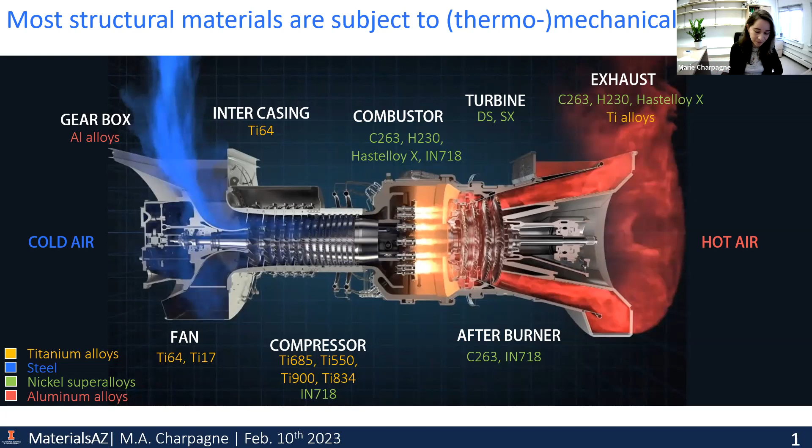All these alloys are, of course, subjected to very different things, but one common solicitation that they undergo is fatigue. Fatigue is this cyclic loading of materials that can be thermomechanical or just mechanical. Over time, this cyclic loading is going to degrade the materials as they're subjected to heating and cooling cycles or power cycles for this gas turbine. Let's start with the hottest part.

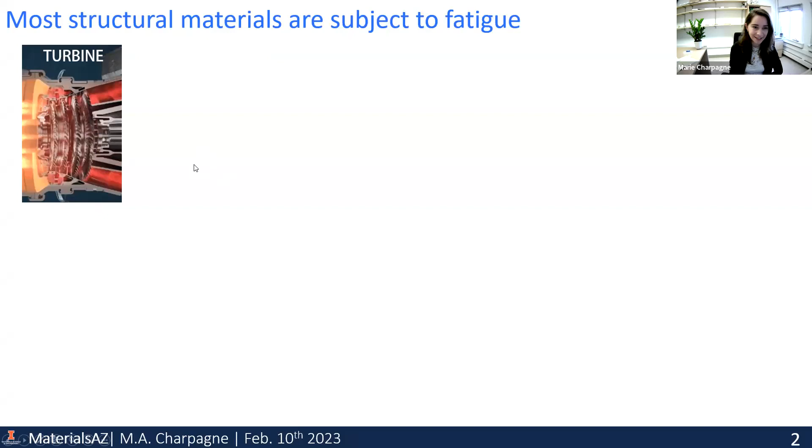That's the most exciting part, where we find those nickel-based superalloys. Of course, you can see they are subjected to cyclic stresses and also temperature oscillations. But I think the most detrimental part is the stress here. So mechanical fatigue is a huge problem. It's a long-standing problem: understanding its origin, understanding the linkage between the materials' properties and their fatigue performance has been a long-standing question for decades. And I think it's a really difficult question to answer, because solving fatigue is pretty much like looking for a needle in a haystack, really.

But when we extract one of those turbine disks in the hottest section and look at where the fatigue cracks actually developed, we find that they are not even located in the region of the disk that was exposed to the highest temperature, but rather towards the edge, where you have relatively lower temperatures. So temperature is not the only problem. The most detrimental areas are actually in the cooler sections of these turbine discs. That tells us where to look and where fatigue really is critical.

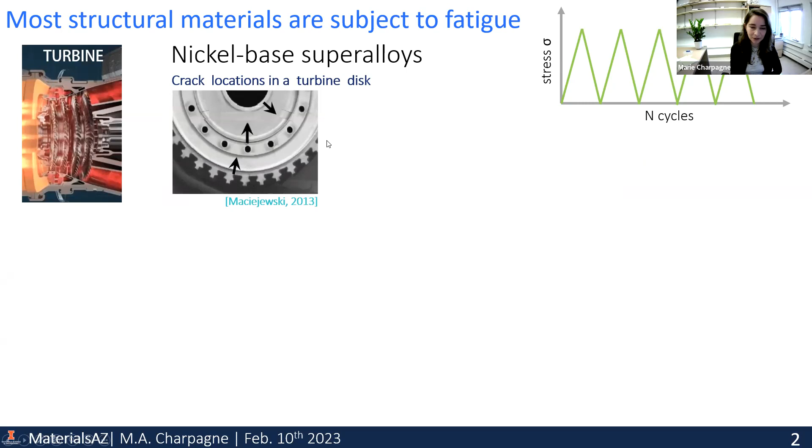When we do so, we identify our cracks and look at these initiation sites for fatigue cracks by looking in the SEM, scanning electron microscope. We oftentimes see some crystallographic facets that show up, meaning that there is most likely a linkage between the microstructure and where those facets are in the material's structure at the small scale, and where the early fatigue cracks are going to form.

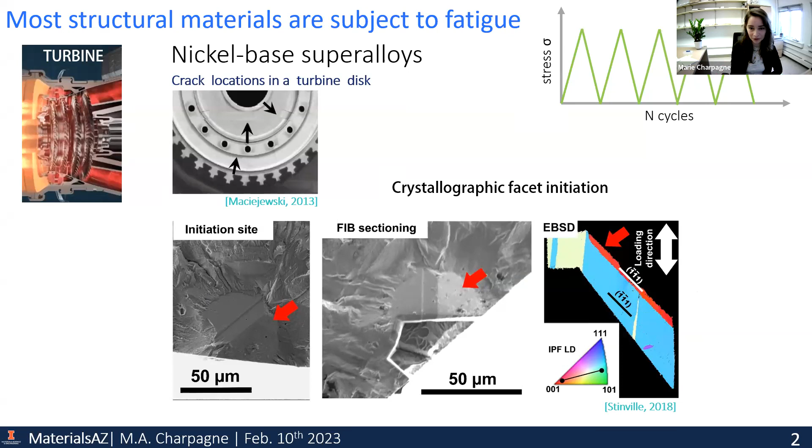So that's the first hint that fatigue is actually related to the material's microstructure, so the crystalline structure of the materials. And looking at the cooler parts in this gas turbine engine, we have titanium alloys. When we look again at these initiation sites, we again find, in pretty much all titanium alloys in recent work where we highlighted this, that the initiation sites also correspond with crystallographic facets.

This is an HCP material, and of course the crystallographic facets are very different. Here we're looking at twist boundaries between the basal planes, between two HCP crystals. And that's after many cycles, right? You don't have a crack in the first cycle, thankfully. But when we look at what happens in the very first loading cycle, we see the development of what we call a slip band.

And so early on, this hints towards the fact that we already have some signature of what's going to become a crack eventually when we add cycles. One bad news, though, is that the density of these twist boundaries is very, very low. We have just a handful per square millimeter of material.

And anyone who does scanning electron microscopy knows that when we look at 1 millimeter by 1 millimeter in the field of view, this is a huge area. And so again, as I mentioned, this is another problem of finding very fine features that are very hidden and buried in the microstructure, and over very large areas. So you have this trade-off between trying to find very small features that are very sparsely distributed in microstructures. So that's the challenge that we're facing when we study fatigue. And that's why it takes a long time to solve these kinds of issues.

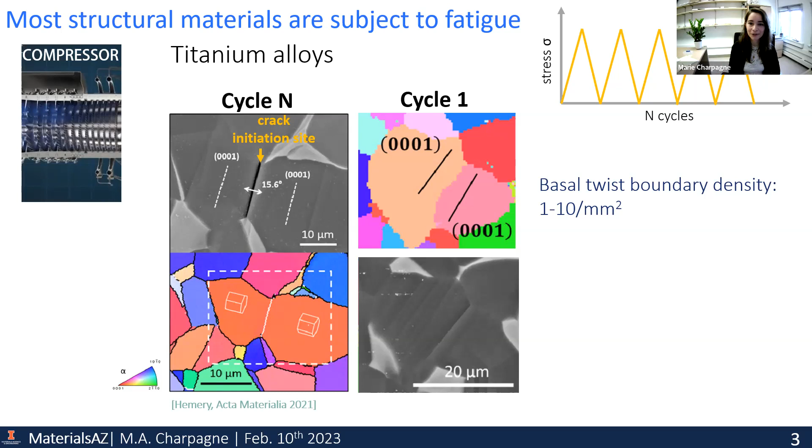But I'm going to show today, with new techniques, what we learned recently on this problem and how these new techniques are going to drive the design of the next generation of structural materials that hopefully will resist fatigue better. All right, so the first part, of course, is that we've got to learn from what we have. In conventionally processed materials, we have essentially engineered materials quite a bit already. So what can we learn from studying fatigue and early crack initiation and early damage formation in those materials? We learned a lot recently, so I just want to start by highlighting this so that we all know where we're starting from. And in the second part, I'll highlight how these findings will help us design better materials.

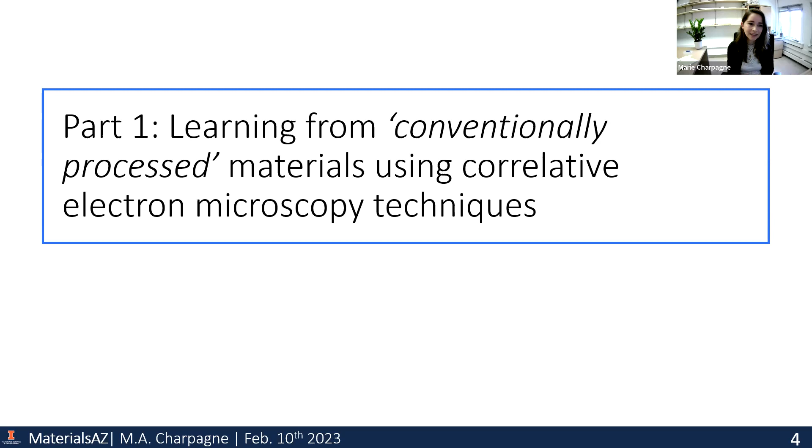Okay, so I mentioned that early on, in the very first loading cycle, we already have some, not even damage, but some plastic deformation that develops in the material. And I mentioned the term slip band, and before I continue talking about this for roughly 45 minutes, I really want to dwell a little bit on what a slip band really is. The slip band results from the motion of dislocations in the crystal lattice. Each dislocation is defined here on this schematic as this half plane that glides on its slip plane. As it exits onto the material surface, you have a unit step, a very small atomic extrusion of unit vector B. That vector has a direction and also an amplitude, and that's characteristic of each material.

And when we look at the slip bands, there are several techniques that we can use to look at them. Here is transmission scanning electron microscopy. This is the modern technique, essentially STEM, but in the SEM, and you can see your dislocations through a thin foil. Here the slip bands are those elongated features where many dislocations have been gliding. Here I've shown the process of one dislocation creating one unit step. But of course, if you have collective motion of dislocations on a similar slip plane, then you get a higher step. So by measuring this step, you can work out how many dislocations actually traveled through the slip band.

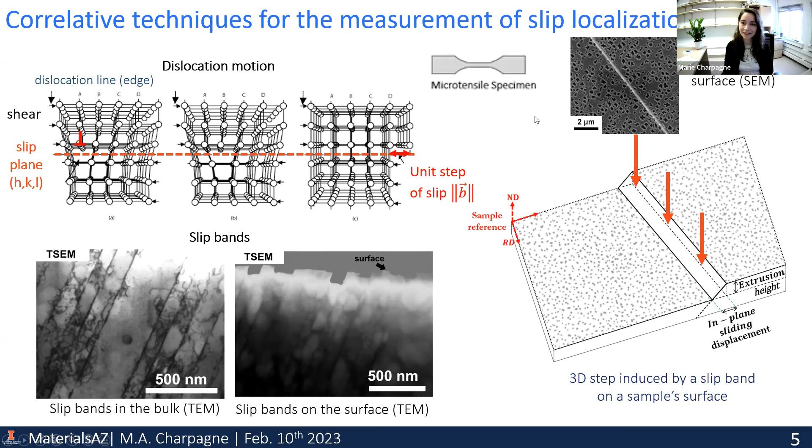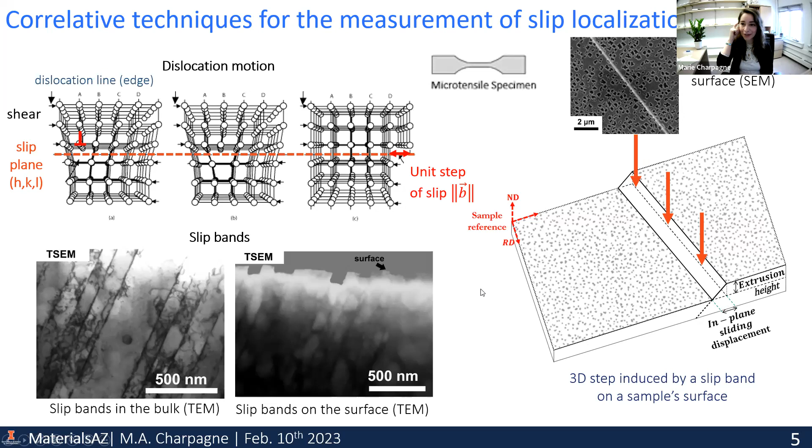So summarizing, this is by looking in transmission. When we take a microtensile specimen and pull on it, we can see, looking from the top of the specimen, those very small extrusions in secondary electrons in the SEM. And these are the signature of a 3D slip band. The slip band is a 3D object, right? So the challenge is, of course, measuring this step. And recently, my colleague JC has developed very high resolution digital image correlation to track how these slip bands emanate on the surface and what signature in displacements they bring onto the surface of these microtensile specimens.

Maybe you're familiar with the idea of digital image correlation. Basically, on the macro scale, you take your sample, your area of interest, and you deposit a speckle of particles or paint onto the surface. And then as you deform the specimen, you can track how these particles moved on the surface. And from this, you can back out your strain in 2 dimensions on the surface. And this is at the macro scale. So this is a commercialized, well accepted technique.

But in the scanning electron microscope, we can do a similar approach. The main challenge is to have a smaller speckle for higher resolution, and also having a stable electron beam so that we can image those particles very well. And this has been developed, as I mentioned, by my colleague JC over the past 10 years. And this is now a technique that works really well. There are several techniques to get those nanoparticles onto the surface. But essentially, the idea of SEM DIC, so DIC collected in the SEM, is that you just miniaturize all the principle of digital image correlation so that you can image much finer features.

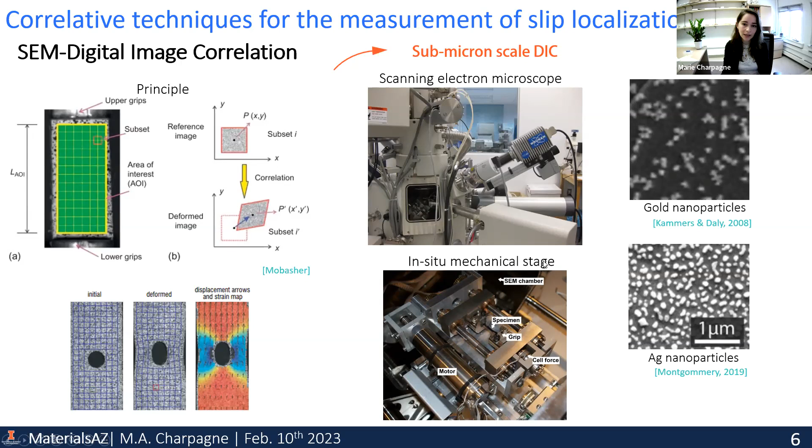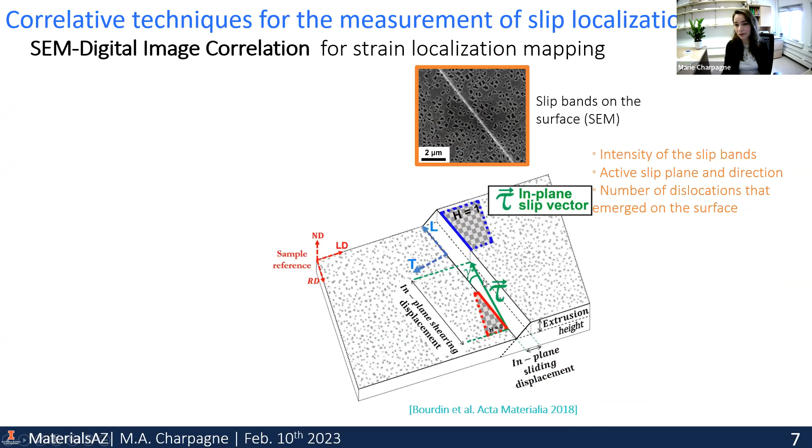And in our case, of course, we're interested in those slip bands, which we can see in secondary electrons. But from electron images, we cannot quantify how many dislocations are actually traveling in that slip band. And so with the new technique that JC developed in collaboration with the French team, they have made these DIC codes tolerant to discontinuities. As you have a slip band that forms here, you now get a discontinuity in your strain field. And the new technique that they developed, which is called Heaviside DIC, allows us to actually quantify the height of this step and how wide it is.

So from this, we can actually back out physics-based information that really represents the reality of what's going on here in those materials, meaning the intensity of the slip band. We can identify the active slip plane, but also the slip direction, and we can even back out the number of dislocations that contributed to the formation of that slip band. So this is now a very powerful technique that we use on a routine basis, because you can probe very large areas with it, up to several millimeters, and it doesn't take that long. So it's very mature and robust right now.

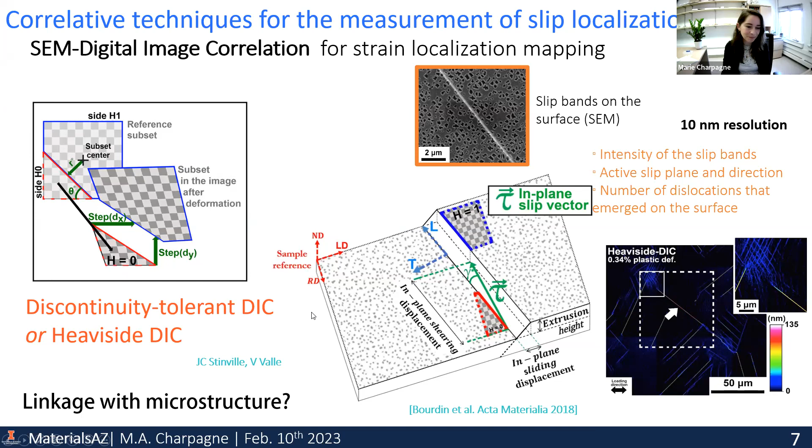So now that we can map what we're interested in, meaning this discontinuous strain field and those slip bands, what question we naturally ask is, what's the linkage with the material microstructure? As you can see here, these planes are related to the orientation of the crystals, and so it's not random stuff. We actually try to understand now how this field of slip bands is connected to the microstructure. So to do this, we need to, of course, map the microstructure, and there are commercially available techniques for this. The most powerful one is electron backscatter diffraction, EBSD. So this is an example of what maps we can acquire with this. Here, each crystal within our region of interest is colored according to what crystal direction is along our loading direction, which is horizontal in this example.

And over the past 2 to 3 years, I've developed some data merging capabilities and correlative microscopy tools so that we can accurately recombine these very high resolution digital image correlation maps with EBSD. The challenge is essentially that you collect these two with different detectors, at different tilt angles, with different beam settings and acceleration voltages, and EBSD is really subject to a lot of distortions. So it's not something you can just eyeball and do by hand, especially when you collect areas that are of the millimeter size. And so with machine learning and image segmentation tools, I was able to come up with a framework that actually takes DIC images on one hand and EBSD data on the other hand to recombine the location of each slip band into the initial microstructure.

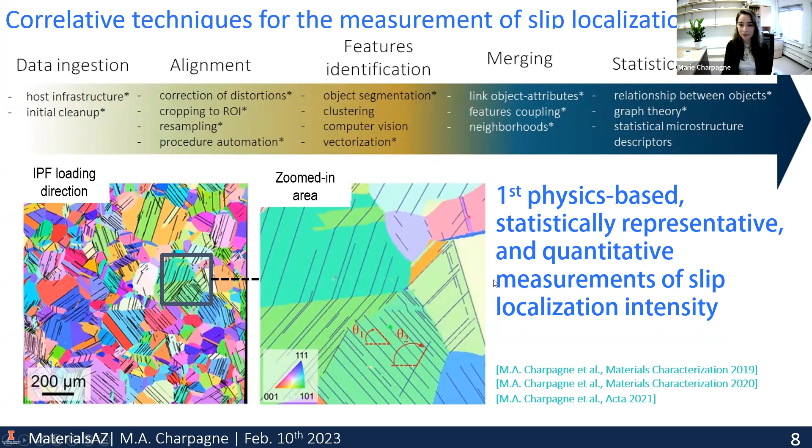And so with this, we have a very robust framework where we can really statistically investigate the slip localization intensity, meaning the intensity of those slip bands, as a function of the microstructure in pretty much any material. So the whole workflow is very robust, and we've collected many data sets. The major finding with this framework, given that we had so many materials, was published recently in a high impact journal, where we found that the fatigue strength of any metallic alloy that deforms by this process of dislocation slip can actually be predicted by the amplitude of slip localization during the very first loading cycle.

So that proves what I was showing initially in the first slides, where I was showing in the first cycle formation of different slip bands. Now that we can measure their intensity over statistically representative areas, we can actually connect this to macroscopic properties such as fatigue strengths, which is what we did here, and find out some universal correlations. So this was published just last year, and I think this is the major finding with this technique.

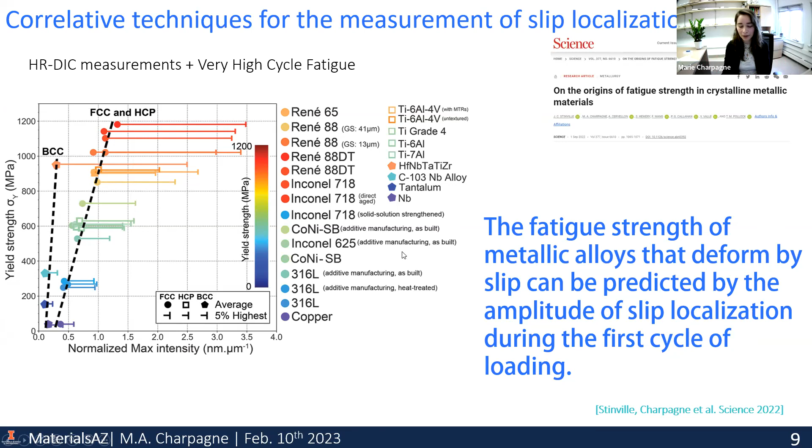So going back to our idea of mapping the microstructure, well, we can now, using this idea that you can extract the fatigue strengths of any material without actually doing a fatigue test, by just doing one cycle in tension, we're now down to trying to understand how the slip bands form as a function of microstructure. And we did that in a bunch of materials in 2 dimensions and found some correlation.

But we thought that, since the dislocations come from the bulk of the material, it would be more insightful to actually collect the 3D microstructure of the material and map the slip bands in 3 dimensions. And this is very much COVID work here. I want to mention, we're all complaining about the COVID, but if COVID didn't happen, I would never have done that. So I came up with this framework that was even more ambitious, where we can reconstruct slip bands

in 3 dimensions. So here, using the tool I just introduced a couple slides ago, where we can recombine EBSD and DIC, I extended this framework so that we can combine DIC with not 2D, but 3D EBSD. And it was very convenient in Tresa's group. We have this tri-beam microscope that's now commercialized, but we can really collect very large volumes of 3D materials. So we came up with this very first merged DIC 3D EBSD dataset, which is very, very insightful.

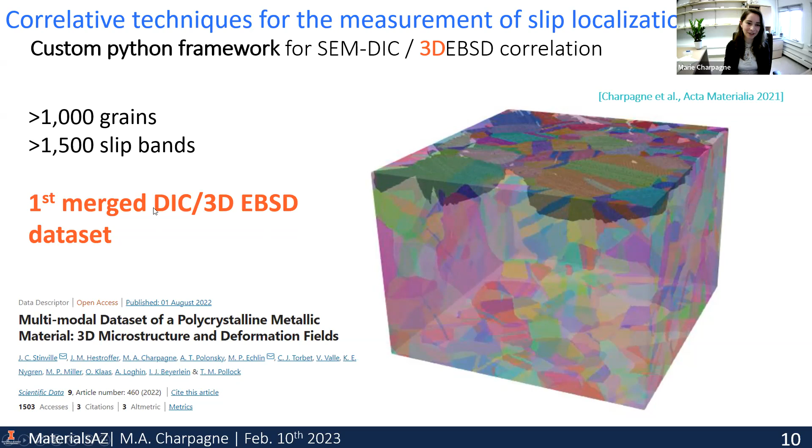And so what we found with this kind of DIC and 3D EBSD merged dataset, well, we can now look for the first time at slip bands in 3 dimensions. And we found that a large fraction of those slip bands actually develops near specific boundaries that we call twin boundaries. These are particular boundaries that form in any FCC material upon annealing, so that's where their name comes from. They're very flat boundaries, and they separate two crystals that are within a particular twin relationship.

We found that most slip bands actually form next to these twin boundaries, especially the ones that are coherent, that are very large, meaning if you have a very large twin plane area, and also the twin boundaries that separate orientations with a large difference in directional modulus with respect to the loading direction were actually the most detrimental. And by this, I mean the most intense slip bands were located nearby these twin boundaries. So that tells us where the weak link in pretty much any FCC material is. It's these coherent, large annealing twin boundaries that have this particular orientation in the material.

Okay, so now that we know what we have to work on, well, we have first highlighted the linkage between the microstructure and the strain field that we can map in DIC. And we have highlighted that annealing twin boundaries are the weakest link in those microstructures. So by tweaking the microstructure, we're hopeful that we can get rid of very intense slip bands and hopefully increase the fatigue performance. So this is our new paradigm that we call slip delocalization. And I'll explain a little bit what this is. But really the idea of this principle is how to design and process better materials so that we get rid of the weakest link in the microstructures.

All right, so the principle of this new approach is to minimize slip localization. And as I've mentioned, we have many slip bands that developed in the microstructure. Some of them are harmless and others are really bad for crack initiation. And so if this is the distribution of the intensity of our slip bands and their number density, well, we usually, in commercially available materials, have some sort of distribution that looks like this. And the detrimental slip bands are the most intense ones. So these ones lead to early fatigue crack formation, and we want to get rid of them.

Now that we know where they are, how can we engineer materials that have this kind of distribution, where you have a modified microstructure so that we get rid of these detrimental slip bands and favor the formation of smaller slip bands of reduced intensity, and having more of these smaller slip bands. Of course, we cannot have a distribution where we just cut off the tail of the orange one, because we have a given amount of plastic deformation that the material is subject to, right? So this is a fixed parameter. So imagine the area under that curve needs to be constant, but we can actually try and shift the curve to the left here so that we don't have those very intense slip bands anymore. So that's our approach.

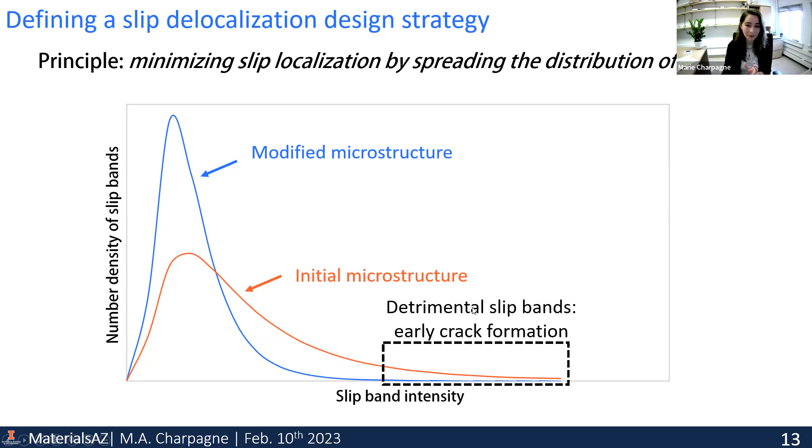And now that we know where these very bad slip bands are, we're trying to work on it. So going back to this idea of annealing twins, when we look at which ones are bad, I mentioned they are coherent, large, and have a particular orientation with particular directional modulus. Well, how can we manufacture materials that either don't have coherent twin boundaries, have lower twin plane area, or maybe select their crystallographic orientation?

About the third topic, I just want to mention that all the materials that we're dealing with are texture-free, so this is pretty much hopeless. And we decided not to investigate this because we cannot really control the texture of the material as much, so that we wouldn't have large differences in directional modulus across the twins. Also because we have 4 twin variants per orientation. So this is, I want to say, almost impossible to do. However, we focused on trying to break the coherency of the annealing twins and reducing their twin plane area. And this was done by adapting the thermomechanical processing of our alloys.

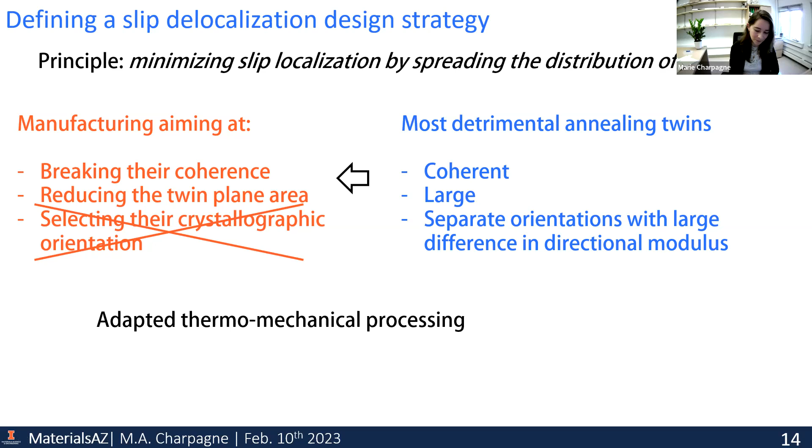So this is the first example I want to detail now. We came up with a modified forging sequence for a different material, but it doesn't matter, another FCC superalloy called the Waspaloy, where we have an adapted process that consists of a first step where we forge our material at high temperature to trigger full recrystallization. So as we are forging at high temperature, we call this dynamic recrystallization because recrystallization is happening dynamically as we deform the material. So we end up with a first category of very large grains that are dynamically recrystallized, meaning that they have some dislocation density.

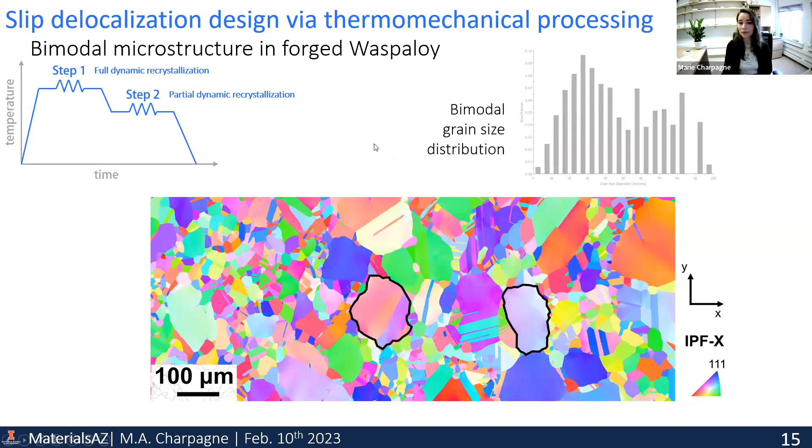And then we cool down our material to a lower temperature, but continue deforming it so that we have partial dynamic recrystallization, so a second round of recrystallization. And because we're at lower temperature, the grain boundary mobility is much lower. So we form smaller grains that don't even have time to consume the first initial big grains. This kind of microstructure is actually called necklace microstructure, where you have very large grains that are surrounded by smaller ones. And we end up with this bimodal grain size distribution, as you can see here.

Another characteristic of this microstructure is that in the grains that were formed in the first step, large dislocation densities remain and were added during step 2. And these high dislocation densities manifest themselves by large lattice rotations. So here I'm showing the same EBSD map, where you can see that those large grains have large rotation in their misorientation with respect to the average orientation of the grain. So this is a signature of the presence of geometrically necessary dislocations that are there to accommodate the humongous amount of strain that we put during the second step.

On the other hand, you see that the smaller grains that were formed during step 2 are much smaller and also more stress-free, if I may say, given that they're pure blue here. They have more consistent orientation throughout, and they are not subject to very high rotations. The reason why we applied step 2, I just want to comment on this, is to increase the strength. Because if you have a microstructure that has very large grains, of course, the strength goes down. So the second round is there to crank up the strength of this material.

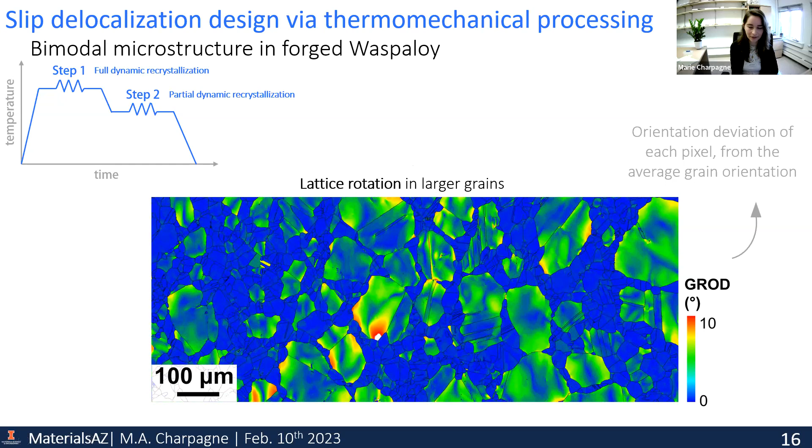So this is another characteristic of those grains. And then looking at what we really are after, meaning the twin boundaries. So we see that in those large grains, of course, we have twin boundaries that formed during step 1, dynamic recrystallization. However, in the second step, they are very distorted because of these lattice rotations that were added.

And so we're looking into how that has affected the coherency of those twin boundaries, because, just reminding you, we want to get rid of the large and coherent twin boundaries. And we find that most of these boundaries have become incoherent during step 2, which is good news. Now they're just like random high angle boundaries that are somewhat planar, but not quite coherent anymore. So this is good news for the larger grains.

And in the smaller grains, as I mentioned before, the smaller twin boundaries are not as detrimental. They're still coherent, but we think this is not so much of a big deal for shifting our distribution of slip localization events.

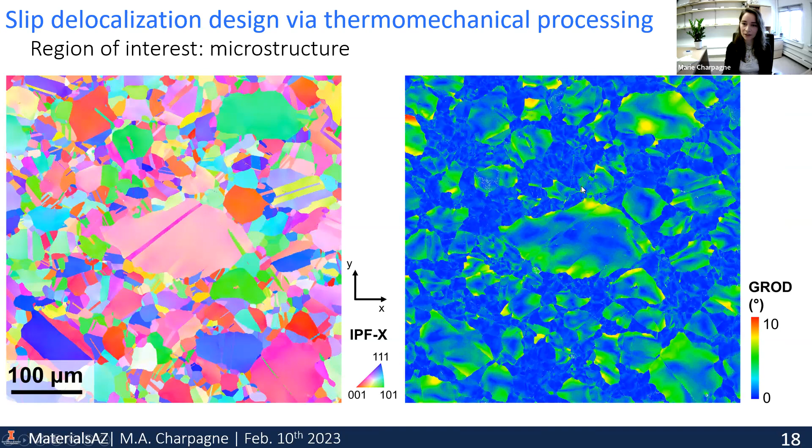All right, so we go back and take this microstructure and actually make a dog bone out of it and measure with high resolution digital image correlation. We measure our distribution of slip band intensity. So this is our region of interest. You can see we have this very large grain here in the center, a couple of others that are subject to very high lattice rotations, and then our second population of smaller grains that are more stress-free.

All right, so because we have correlated data with orientation versus DIC, we actually can look at every single slip band that formed nearby twin boundaries and check how their intensity has evolved in comparison with an equivalent material. So this is comparing with a different material, Inconel 718, which has a similar yield strength. So we can roughly compare these two qualitatively.

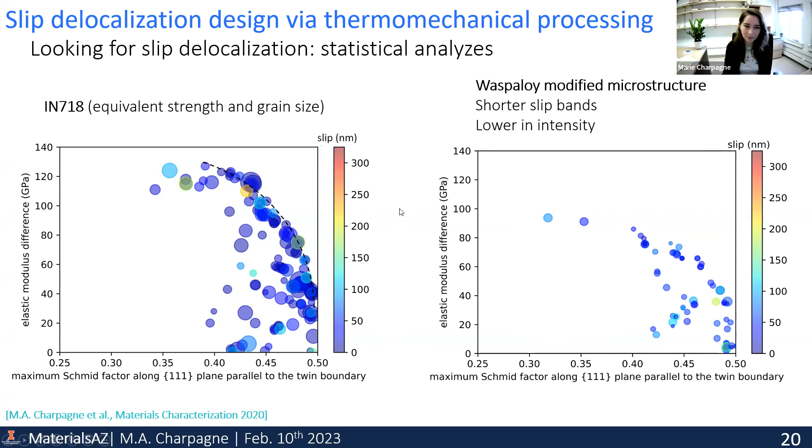So that's the first mechanism, which is good at making slip bands of lower intensity. But of course, we still have a fixed amount of plasticity that this material needs to accommodate. So we found a second mechanism, which we call stop and go for lack of a better name for now. Essentially, this happens again in those regions of high lattice rotations, where some slip bands not only decrease in intensity, but sometimes you also have the formation of another slip band of mild intensity nearby the first one and on a similar slip system.

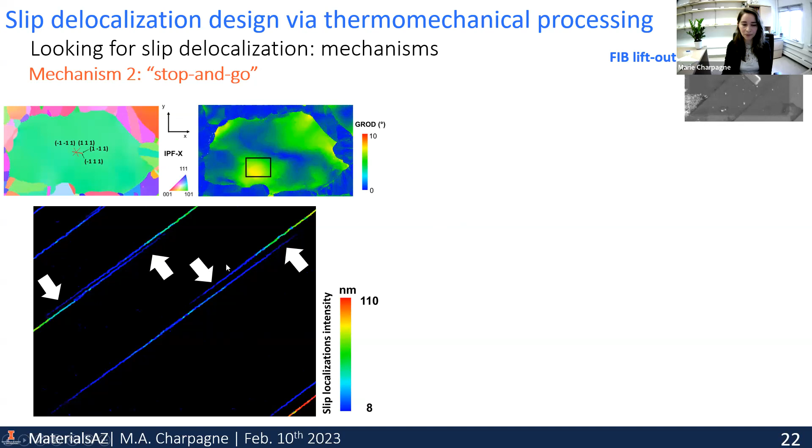And here are two examples. So we had the first slip band here and the second one that formed after the fact. And here another one and this very mild slip band that came in right nearby. To try and identify the fundamental mechanism behind this, we took a FIB lift-out to see in depth what happens in the bulk of the material, underneath this surface. And we actually found a lot more dislocation activity than we thought we captured on the DIC maps, meaning that we have way more slip bands that contain very, very few dislocations underneath the surface.

And the question of what the fundamental mechanism is is still in the process of being answered. We can think of either cross slip from one slip band to another, which is kind of difficult to tell from how tangled these slip bands are and how compact they are. But that could be one mechanism. The other mechanism we're thinking about is activation of a second source of dislocation just nearby the first slip band. So, like from the bottom of the grain, a second source gets triggered to emit another slip band. So this is still unanswered. It's a very tough question to answer, but I think the fact that we see these kinds of mechanisms is very promising with respect to fatigue.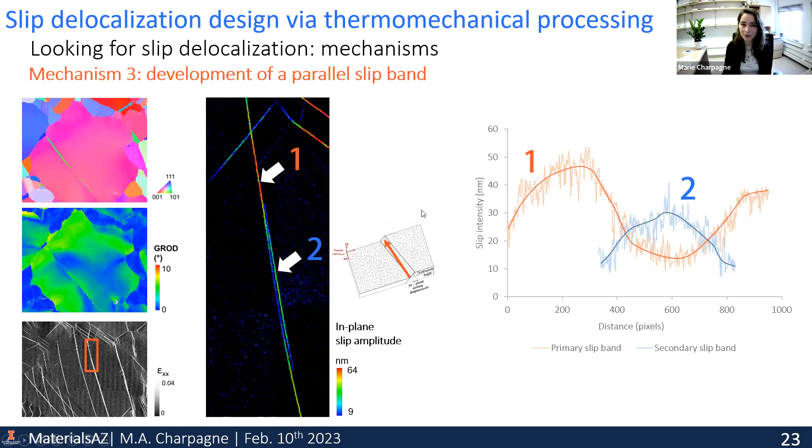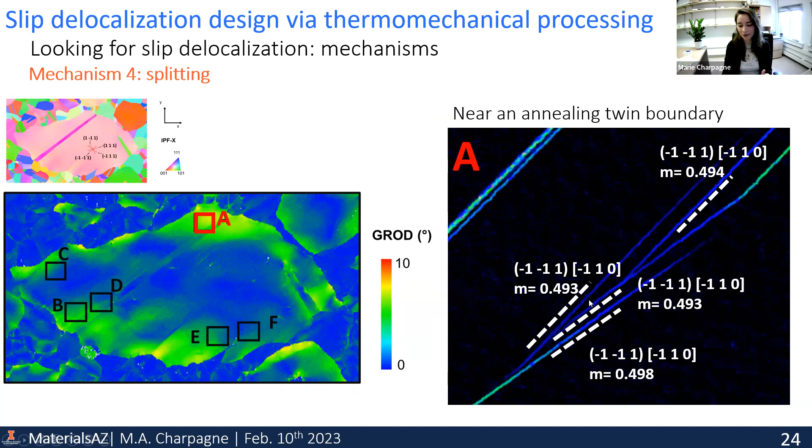in this alloy. And finally, we have an extreme event that's very interesting. We call this splitting, and I want to illustrate this in the central grain of the dataset. This is when we have a slip band that splits into many parts, and we can see that this is a direct result of the lattice rotations. All the split parts still follow the same slip system, but the dislocations are distorted onto that plane that's physically distorted. And we have a breaking apart of the initial slip band into many different parts that have much lower intensity. I think we're still quantifying the distribution of those slip bands, but we'll for sure find many more slip bands of lower intensity. And by all four processes, we decrease our overall slip localization distribution.

Okay, so I really wanted to show you some fatigue data today. The test is still running, which is good news, I guess. So more to come. We're hoping to publish these results very soon.

But before I wrap up, I just want to finish with another approach that we can use to continue on this path of slip delocalization. What about just having no twins in the microstructure? Because, well, that's more drastic, but I guess why not? Or even fewer twins, because we managed to break their coherence or reduce the twin plane area with thermomechanical forging sequences.

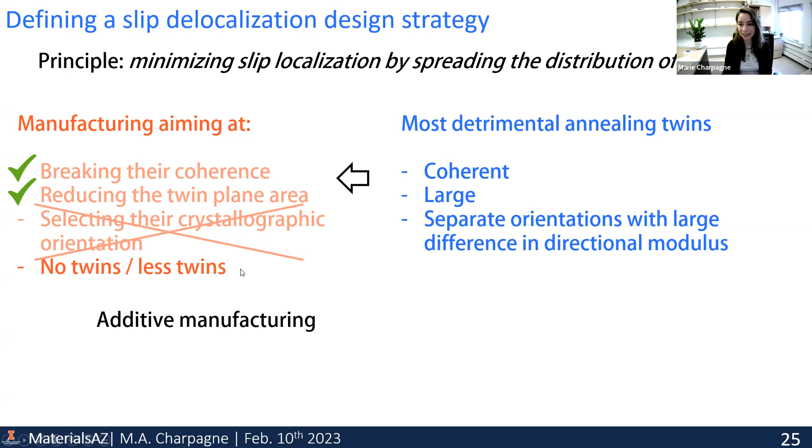But actually with additive manufacturing, we get materials that have no twins or very low twin density. So how about we just look at what happens in these materials? And these are actually very promising. Here is an example in AM316L, another FCC material, where we see again two of the mechanisms that I mentioned before. The first one being attenuation, where you have a slip band that just dies off in the center of the grain. And again, this stop-and-go mechanism here in a second region of the material.

We have not tested this one in fatigue because, well, anyone here who works on additive manufacturing knows that there are much worse things in those additive manufactured materials, such as pores and cracks and smaller defects. But I believe that once we manage to minimize the amount of defects, these materials will actually be pretty good in fatigue.

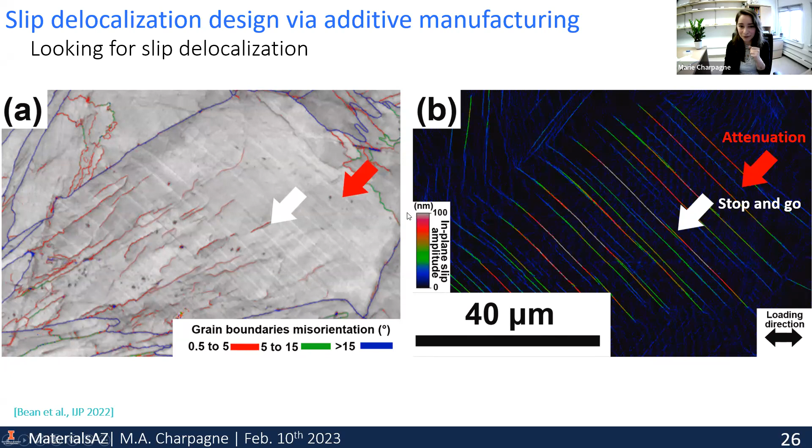All right, but this was on a material that we put zero effort into optimizing for our slip delocalization approach. And now what we're working on in my lab is actually printing our own alloys. And there is no better way of doing that than having your own printer, because we need to spend a lot of time doing this. So we're now printing our own alloys and using this technology of laser direct energy deposition, where we blow powder underneath a laser source, and we build our materials in a laser cladding process, essentially.

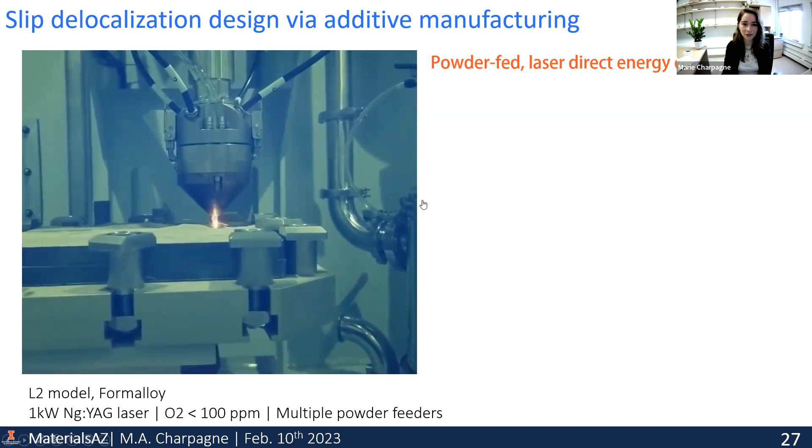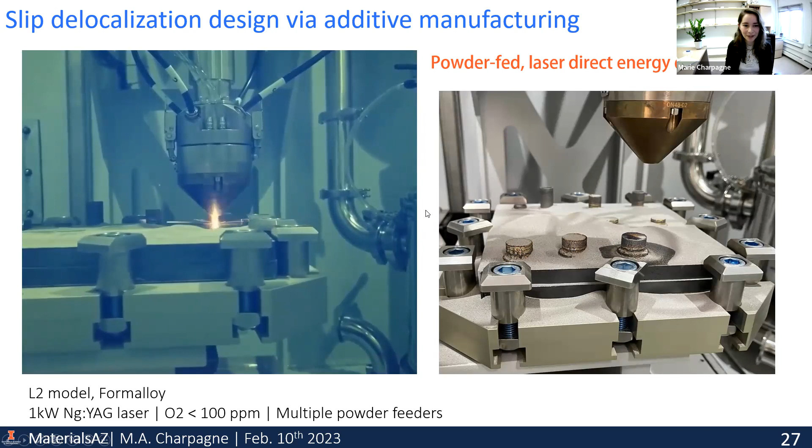So this is very recent. We're going to look at the DIC maps of these materials very soon. And now we're just playing around and finding what printing parameters give the best microstructures in those materials. We installed our printer like 2 weeks ago, so this is very recent, but we're in the process of characterizing the microstructures. And what we have so far is very long, elongated grains that are full of different orientations. And also, of course, you can imagine this one will have high lattice rotations. They have very intricate structures, but the main thing I want to comment on here is that there are no twins. So this is pretty good news.

It now just comes down to minimizing the number of defects and the defect density in those materials so that we can engineer their microstructure better. And this is a huge challenge because as we zoom in and look at what's inside those grains, we see very small regions, a lot of low angle grain boundaries, a lot of segregations, a lot of smaller particles, tiny keyholing. So there is a lot more to it than characterizing the grain size. And we think that EBSD alone, by characterizing the grain orientation and its distribution, will not help us too much. So we're looking into optimizing the substructure inside those grains.

I also mentioned that those materials have, of course, no twin density, but as you can see, the grain size is very high in this previous micrograph. And so what we need to work on is techniques to refine it. And a natural thing that can come to mind is static recrystallization after printing.

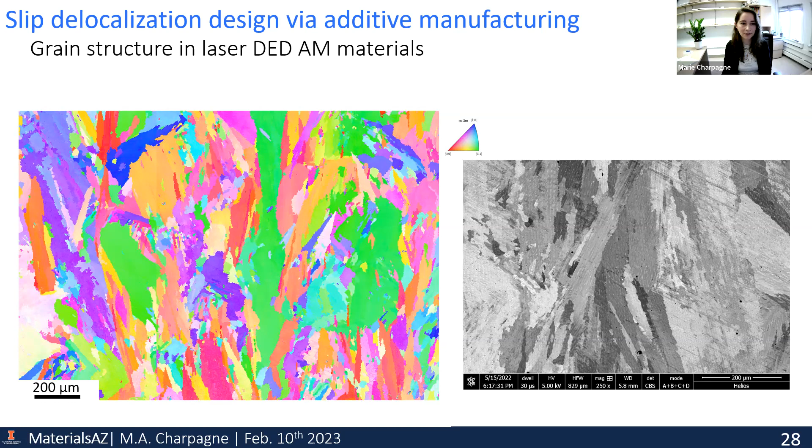So in order to get this bimodal microstructure like we had in the Waspaloy alloy, it's actually more challenging than we thought. So we're working on this and we're designing new strategies for printing that I like to call print to recrystallize, where we not only print materials with the aim of having them fully dense, but we print them with the aim of maximizing the number of nucleation sites. So that implies that we need first to understand where nucleation happens. And this is a daunting task because of the very high complexity of the microstructures.

So again, maybe in many years we will talk about this again, but I'm hopeful that we can tune our microstructures so that we increase this number density of nuclei and can have refined microstructures that perform better in fatigue.

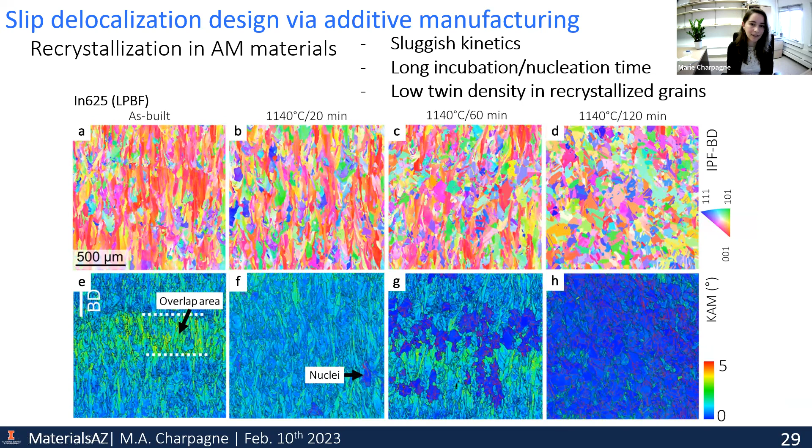All right, so concluding on this, we've shown that high resolution and large area mapping techniques in correlative electron microscopy have revealed the fundamental origins of fatigue strength that's universal to pretty much any material that deforms with this mechanism of dislocation slip. Using a combination of 2D and 3D techniques, we found the weak links in FCC materials. And we're now working on innovative manufacturing strategies to increase fatigue strength using this newly found knowledge. So with this, I'm gonna wrap up. Thank you so much for your attention, and I'm happy to take any questions.

All right, Marie, thank you for a wonderful talk. I really enjoyed it. I feel like I learned a lot too. Do we have any questions? Christina, go ahead and mute yourself and ask your question. Oh, she's just clapping. Sorry. Let's see. Anybody, any questions? I have a question. Go ahead, Peter.

Thanks very much for the nice talk. Actually, a couple of questions. When you talk about the twins distorting, I'm just trying to visualize, and I'm a TEM guy, and we often look at grain boundaries and things like that. So, if you think of the mirror plane that would run down the twin, when it distorts, you had said something about it becoming incoherent. Is it still kind of like a twin, or does it restructure and form something else?

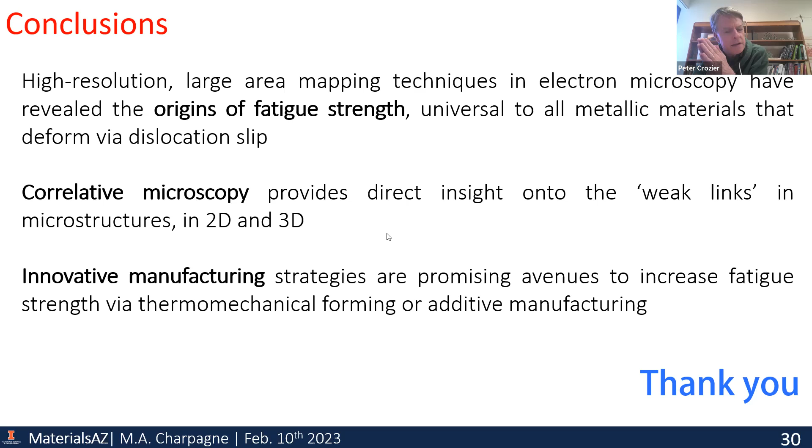Just a follow-up question then, and I apologize if you already said this, I had a slight interruption. The slip planes, I wasn't exactly clear on the relationship between the slip planes and the twin boundaries. You say that the slip planes are close to the twin boundaries. Yeah, for sure. I went really fast with this because I look at this all the time, but that's a very fair question. So this is your twin boundary plane right here, and it's inclined. Crystallographically, this is the same 111 plane type as where the slip band develops. Am I reading the image correctly? The slip plane is about 100 nanometers away from the twin boundary plane, is that correct? Yeah, absolutely. So that's what I wanted to find out next.

From the nature of the plane, it's actually the same crystallographic nature. So these two are fully parallel, but for some reason that we don't understand just yet, the slip bands form close to the actual twin plane, but not on it. But when you say close, if you say 100 nanometers or 50 nanometers, that's like miles away from an atomic point of view. So it would mean there had to be some strain propagation over quite an extended distance, I guess. Is that how you're imagining it? How we're interpreting this is that this twin boundary separates crystals that have very high difference in elastic modulus. So from finite element analysis, very simply, if you mesh this grain and strain it, you would see that there is a high stress concentration near the twin boundary. What we don't understand is why the slip band forms close, but still at a given distance from the annealing twin boundary. This we cannot understand just yet.

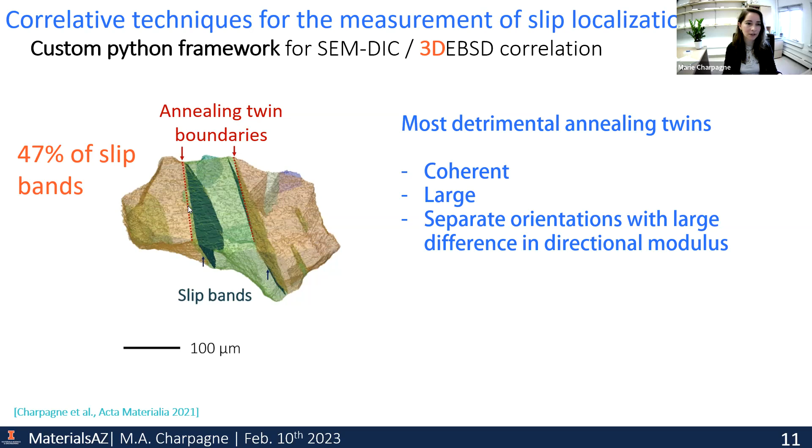There is another configuration that we reveal. I have another slide for this, using this 3D microscopy. We also reveal that it's very useful to look at 3D microstructure instead of 2D, because there are some slip bands that we thought just are not connected to the microstructure. So this is our surface here, and we see this slip trace. But when we project it into the volume, we find that it actually emanates from a triple junction. To understand where every single slip band forms and where it comes from, you need the 3D microstructure and also this high resolution DIC. We found that a lot of slip bands are connected to triple junctions that are buried underneath the surface. And naturally, a triple junction has a high likelihood to connect grains that have high incompatibility when they're strained. This is something we revealed using this 3D EBSD and DIC correlation.

No one had seen it before because you can't see where all slip bands come from if you don't investigate this. So this happens concurrently, and understanding how these two interact with one another is not easy, but I think modeling there is going to be the answer. Okay, thank you.

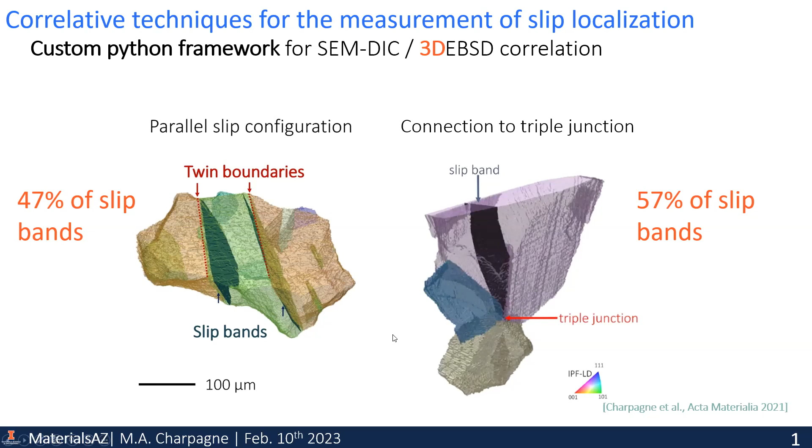Dr. Marie, such a nice talk. My question is just regarding the 3D work. I'm wondering how is this 3D reconstruction of the slip band possible? Because the moment you polish it off, the slip step would vanish, right? Absolutely, yes. Again, excellent point, and I'll also have a slide for this that I hope will make more sense.

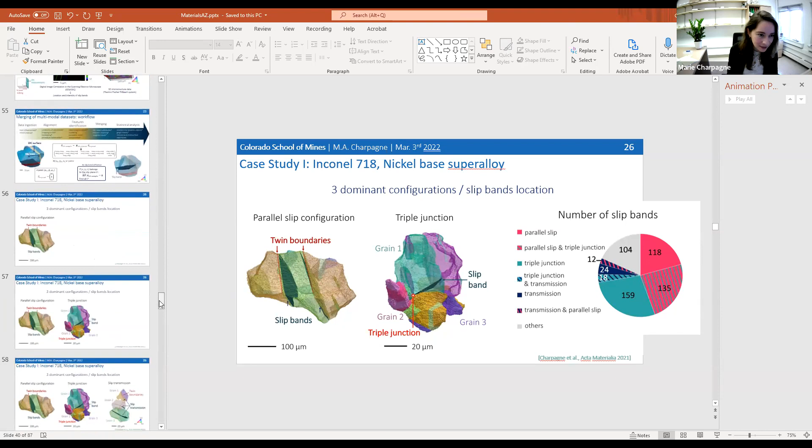Okay, so this is what I want to show. We have here the whole framework, and as you mentioned, you can see the slip trace on the DIC surface, and you have your grain structure on the surface. But as we ablate the material, there is no sign of any plastic activity underneath this surface that we can tell just by looking at the data. So the framework that I developed takes the slip trace and determines the 111 plane on which every single slip band is lying, for over 1,000 slip bands in the data set. We find automatically which one of the four 111 planes is active for each slip trace.

And since you know that, and you know your local crystallographic orientation, you can rotate back this slip plane and represent where it would have landed in the grain. So it's essentially calculating the normal of that plane in three dimensions. And given that we have at least two points, here the endpoints of the slip band, a normal to a plane plus one point fully defines the plane. So that's how we reconstructed every single slip band in this data set.

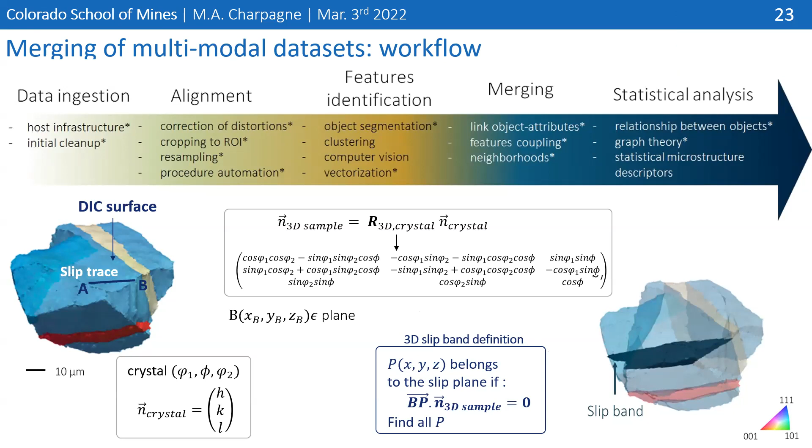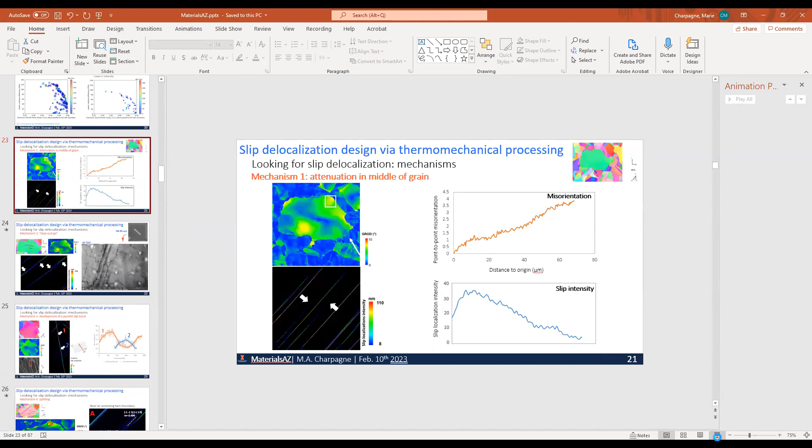Yeah, I got that. Can I ask just one more question? That is on the mechanism of slip delocalization. Near the regions towards the grain boundaries where there is a lattice rotation, it was shown that the slip band kind of vanishes. So I think that slip didn't occur at that point itself, right? That is the thing. There is a lattice reorientation there, so maybe that orientation is not favorable for that slip to happen. Yes. So we're looking at Schmid factors and doing some basic analysis now to understand what goes on.

Okay. Thank you. I had one question, Marie. It's more directed at the students that are here today. I'm just trying to imagine, you have some sample microscopically, and you mentioned finding the needle in the haystack. And obviously, as you go into the sample and choose an area and choose a volume, you don't know exactly what you're going to find. So tell us a little bit about that process, how are you choosing locations and what guides you in that process? You're like an investigator, right? So how do we pick the region of interest is what you're asking?

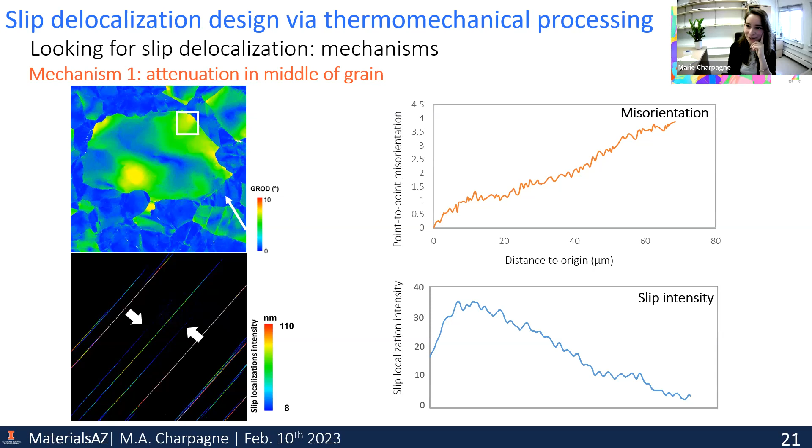Actually, the answer is I'm very much an advocate for running non-biased analysis. We machine our microtensile specimens completely blindly from homogeneous material, we hope. So when you start from a big piece of material, we just machine them, and then we just look at the center of the gauge, and whatever is in there is whatever we investigate. We're dealing with very high resolution data over large areas. We just go for the largest area that we can collect physically with the capabilities that we have.

We just do this sequentially. When we map the DIC, we take smaller tiles that we then stitch together, so this is not one single image captured in the SEM. It takes about 6 hours to collect one of such images, and then running the correlation takes more time. But essentially, we don't pick any region in particular. We machine our dog bones and we work with what we have right there.

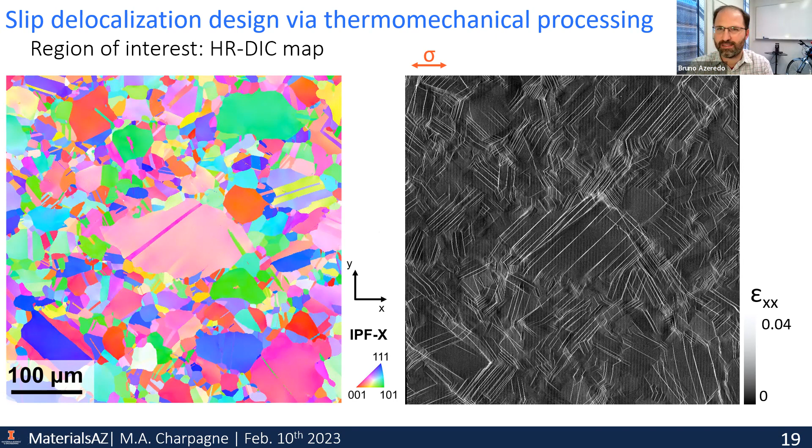Wonderful. And one more question is regarding the forging process. Do you have any more details on how that's done? I don't actually. This is all I can tell. Essentially, with the understanding of roughly how dynamic recrystallization works, if you work at a higher temperature, you'll get a bigger grain size. By looking at this, I can mentally imagine the big grains will form first, and then in a second step, smaller grains form around them. This is a classic scenario for dynamic recrystallization, and we know roughly what grain size we should get at temperature 1 and at temperature 2.

The main challenge here is when should you stop at step 2? Because you don't want full dynamic recrystallization at step 2. You don't want those smaller grains to completely invade the bigger grains that are already there. So this is very much a challenge to do. This material was provided by our collaborator, and it's quite amazing that they could manage to get a bulk piece of material that has such finely controlled microstructure. Yes, wonderful. That's how it works.